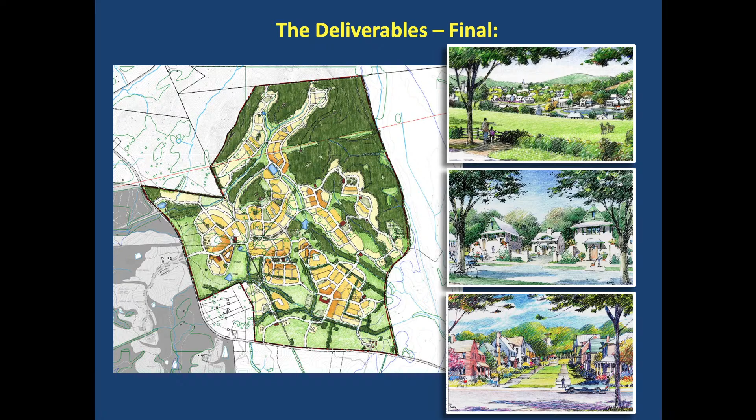Oh, by the way, this is just to remind me to talk about the comp plan.

This is the town of Jamestown, October 2000. I think this was recently, or is about to be updated, confirming this. This is the future growth strategy map, the future land use map, and it specifically mentions the Johnson property, and new traditional neighborhood development in language very similar to what we talked about last night. So it is consistent with that. This is an opportunity, if that's not what you'd like to see, this recommendation went through a very similar public vetting process. But if that's not what you'd like to see, this is another opportunity to potentially challenge that.

Assuming we're still tracking and consistent with the general preferences expressed by the community as a whole, and I think the dot exercises support that for the most part. We missed on a couple of things clearly, but for the most part it's more a matter of degree than whether or not it's specifically inconsistent with any of those goals and objectives. Just a quick reminder: neighborhood-based, walkable, connected, provides housing choice, range of house types and price points, and mixed use. As we just reviewed the dot exercise and the comments, I think these are all consistent. I don't see any inconsistencies here.

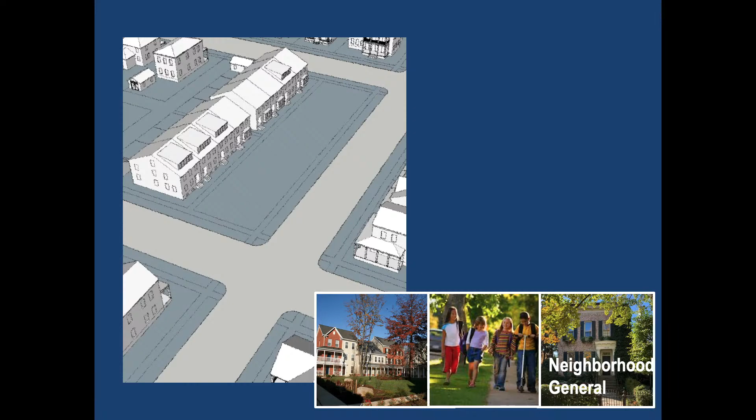So this is what I think we got wrong yesterday. When we talked about that neighborhood edge, we heard a lot about 'this isn't Jamestown' or 'we're being forced to pick a TND,' for instance. We talked about the attributes of TND in part because we believe that's a smart way to build a community, and that most communities most people like in most places actually have a lot of those attributes. It's kind of a question of how much of what, versus whether or not those principles are largely embraced. I think the exercise we went through did a pretty good job of showing that.

What we didn't show here - we showed a lot of neighborhood general conditions, but when we got to the neighborhood edge, this really didn't look like Jamestown. When we got that feedback online, I went and looked at all the images and examples we used to talk about these ideas, and I said, they're right, that doesn't look like Jamestown. That really wasn't our intention.

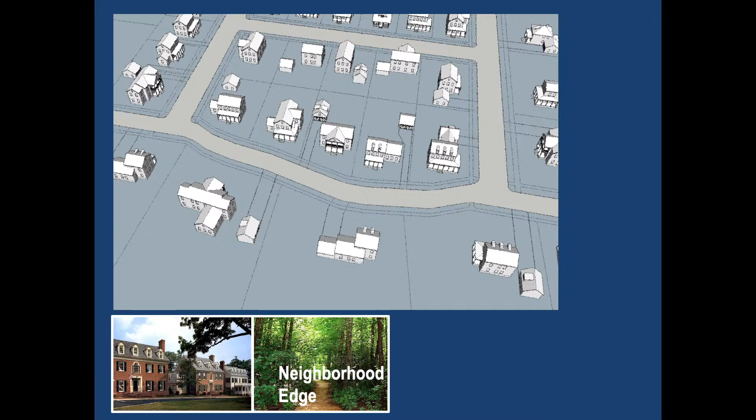So we took a few minutes off from our very busy, hectic, and challenging day, and we got some pictures of houses that look like Jamestown. You know how long it took us to get these?

About 2 minutes. You know where these pictures were taken? Right down the street. This is everything we're talking about here for the edge conditions. The garages are set back from the street, and they're either rear or side loaded.

All of this can go into a TND. In fact, we want this in the TND. This is the kind of edge condition that says you're in Jamestown, and it says there's market demand for this kind of product here, but also potentially market demand for other things, all of which together can make a great place.

We talked about how the design of the neighborhood itself can impact the value of the housing, and we can do exactly the same thing in Jamestown. So we didn't get it exactly right yesterday, but today is today. So we have an opportunity to put this back in front of you and ask, is this what you meant when you said it doesn't look like Jamestown?

You can go ahead and say yes or raise your hand, or whatever. We're going to ask the same question to people online. But I think we got this yesterday, we just didn't put it up there. This was an opportunity to come back and say, look, we got one thing wrong, and this is one of the things we got wrong. We got more than one thing wrong, but this is one of them. So when we plan these plans, when we say neighborhood edge, this is what we're talking about right here, okay.

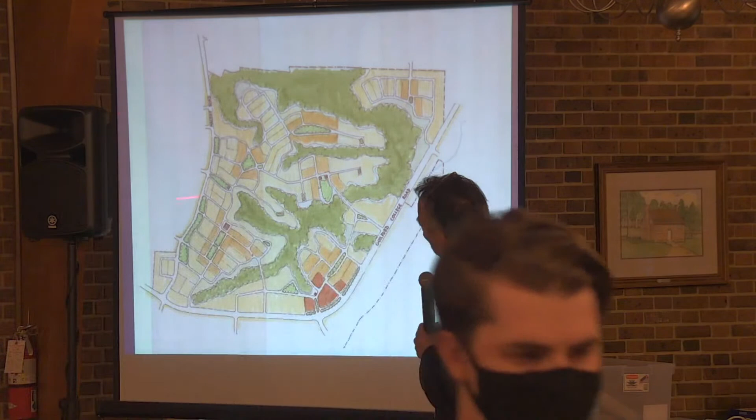Okay, so this is Guilford College. North is that way, I believe. So the community college is down here. This is Guilford Road, this is Guilford Road.

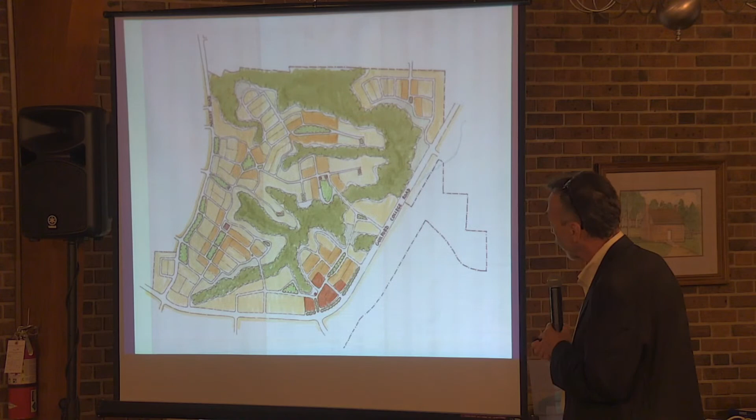Tomorrow night we'll have all of the plans oriented the same way. You can see that diagram we started with yesterday, where we blocked out all of the parts of the plan where we will not build, for all the reasons we talked about: stream buffers, creek crossings, steep slopes, et cetera.

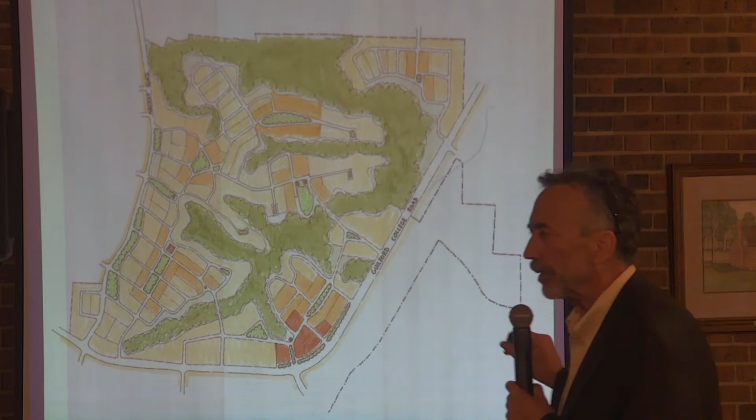This is a small neighborhood-scale retail commercial center. That's going to be a subject of discussion probably through the whole week, but it's much smaller than what we saw diagrammatically last night. And again, it can probably move, but this seems to be the frontage it wants to be at, because it's facing basically a utility easement and has exposure to the traffic along here.

This is basically a pocket neighborhood unto itself, because it doesn't really attach to anything, although there is a potential connection through there if needed.

One of the things we were trying to do here, there's a fairly large wooded area right there. When we have those, and we're trying to decide between what trees to save and what trees need to be sacrificed in the name of quote-unquote progress, we try to provide a nice neighborhood in lieu of those.

A lot of times we'll go in and document the specimen trees within the site and incorporate those trees. In fact, the Kentlands did that on one of the first projects of this nature—there was a beautiful huge tree that they actually made a little pocket park around. When you get to that level of detail, you can actually do that.

The flexibility of the plan gives you the opportunity to do that. And we would normally, if we were taking this all the way through, design at that level of detail. This is really more of a diagram, but it tries to capture the essence of the site and its potential.

So this is a neighborhood, not a pod, and it links through and connects up with other neighborhoods. You're taking a fairly disparate network of buildable parcels of land and trying to turn it into a community—a community of three neighborhoods. This is almost a more detailed physical manifestation of the diagram you saw last night, connecting the dots not only in terms of access, but also internally in terms of neighborhoods.

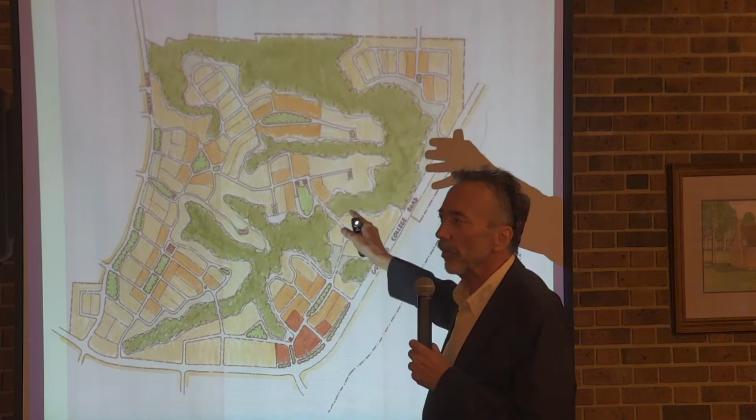The value of it is that it shows how those principles can be applied to a specific piece of land. But you could do a hundred different variations on this, and they would still respond to exactly the same principles, same preferences, same ideas we talked about last night. We don't have time to do that many, and we don't really think we need to, because we're trying to work towards the best possible plan based on the input we get from you.

But when it gets skinny, it gets skinny. Where it gets bigger, you have those small-scale, fine-grained street networks so that you can live here and visit your neighbor over there on your bicycle or on foot, without having to leave your pod and go into another pod, et cetera, et cetera.

You can also circulate within the neighborhoods very easily without having to get out onto the collector roads.

But we've also done things like this. Because we had an existing wooded area here, we kept that as a frontage condition. We looked at every single development along the street, and not a single house, residence, or even the dentist office actually faced the street. Everything else turned its back or its side to it. So we said, well, we could do that too, but we could also provide an amenity for the community as a whole. So that's what we did.

We also saved some of those trees to make a neighborhood park here, so that the trees are being respected and used in a way that adds value to the community as a whole. They're not just a stand of trees out in the middle of nowhere—they're adding value to every single home in that neighborhood.

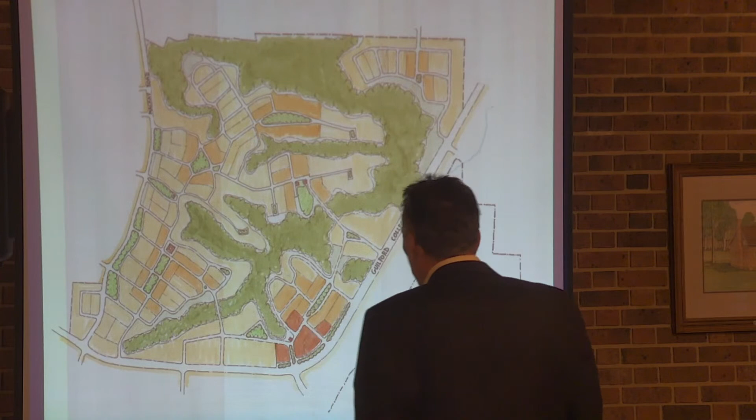The other thing that's nice is you could potentially bias some of these neighborhoods towards, for instance, more senior living or a different stage of life, young marrieds or whatever. But you have a range—you can certainly get a range of product types and price points within each of these. And it's not hard to imagine everybody feeling like they belong to the same community. That's exactly how they live. In fact, Keith and I were talking about that today.

West Haven, you said, is probably the most valuable piece of real estate in all of Metro Nashville. And he said the thing that makes it so valuable, in part, is because everybody feels like they're part of the community. You guys should talk to Keith. So that's the first plan.

Yes, sure. Yeah, sorry, yeah, I'd be happy to, and I apologize for that.

Well, again, remember, density is a relative thing. We had three people working, and everybody was sort of working at different levels of coming to terms with the site. One of the reasons why we use three designers, and sometimes more, is that everybody approaches it a little bit differently. What normally happens is that one single plan is not typically the clear winner, but the community will see bits and pieces of each plan. It's a little bit like the Chinese menu approach—you take the best parts of each one and then combine them together.

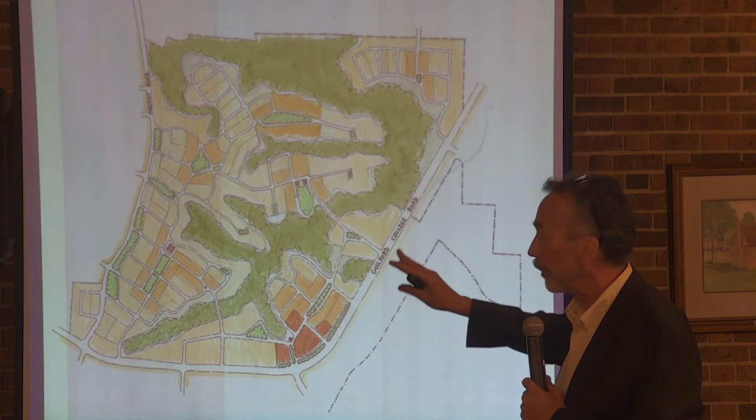This is pretty coherent for a first day. Again, remember, we started drawing—we didn't just start drawing this morning, we started designing it this morning. So this one is not quite so far developed, but that's the nature of this. When you start, you don't know where you're going to end up.

But getting back to your question about colors: the colors represent center, general, and edge. They go back to that diagram you saw last night. They each have a different character, and a little bit of a different bias in terms of relative densities. But all of that can be ramped up and all of it can be toned down, and I can show you examples of both in every pre-war neighborhood out there.

So don't fixate on the densities in overall terms. Just remember, this one is not really diagrammatically very strong, because generally speaking the center should be in the center, and here things got a little bit disconnected. Yellow is the general neighborhood condition, orange is supposed to be the neighborhood center condition, and the light yellow is supposed to be the neighborhood edge condition. I hesitated to put this up because it really isn't developed enough to talk to.

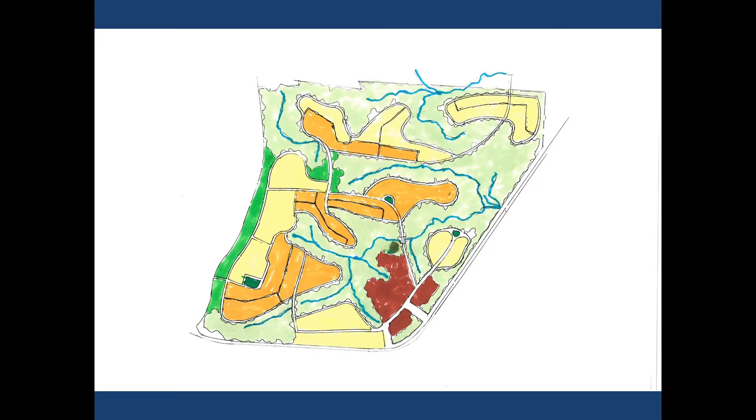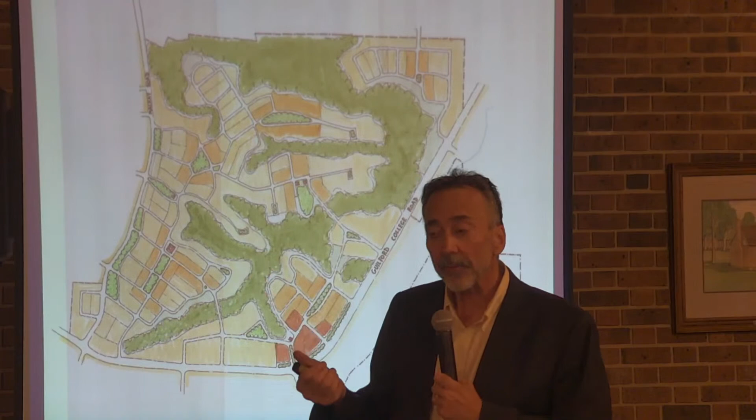But getting back to your question, these are the same—this is an easier diagram to understand. This is the neighborhood center, so it has the higher density house types. That could be townhouses, but it could also be narrow lot single family homes. Sorry to interrupt, but the darkest color is the center, and the orange is more the general. Oh—the yellow is the edge. Okay, then so everybody interpreted it a little bit differently.

But I would interpret it actually probably as the center and the edge. The point is, it's a hierarchy of relative densities and unit types, building types based on those relative densities. But we could make that whatever the community would like it to be. The idea is there's a neighborhood center, a neighborhood general, and a neighborhood edge condition, and we can decide collectively what that means in terms of density. Right now it's a diagram showing those principles applied to this piece of land, and there's a lot more conversation to have, but now we can have a conversation about an actual plan on an actual piece of ground.

So that's the point for that. But anyway, I'm sorry for the confusion, and this is probably more confusing than it is illuminating, so I'm going to move to this one.

This one's a little bit better as a direct comparison with the first scheme. It's oriented the same way again, but you're seeing the same notion of neighborhood center, neighborhood general, neighborhood edge. In this particular case, some kind of neighborhood-serving amenity, whether that's retail, a day school, whatever it might be.

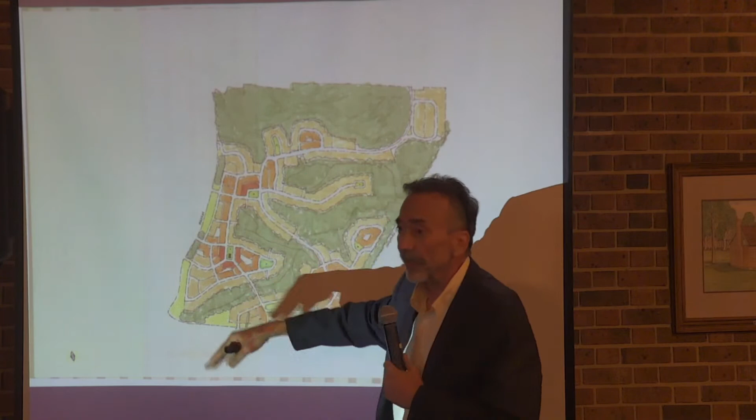You're seeing that same structure laid out, and you're seeing the places that are not only not developable, but could basically be a contiguous linear park or an emerald necklace, so we could put walking paths in there. We're preserving the natural habitat, but it's the shape and nature of the neighborhoods being informed by the topography and features of the site itself.

These need to be developed, and they will be developed, and to a large extent we're going to struggle a little bit to ask specific questions about what you like or don't like about these plans based on what we have here. So I'm not sure we should engage in that exercise right now. We'll meet again tomorrow night where we can develop these a little more. But you can tell us you like this plan better than that plan, and describe why. Okay, now a couple more things.

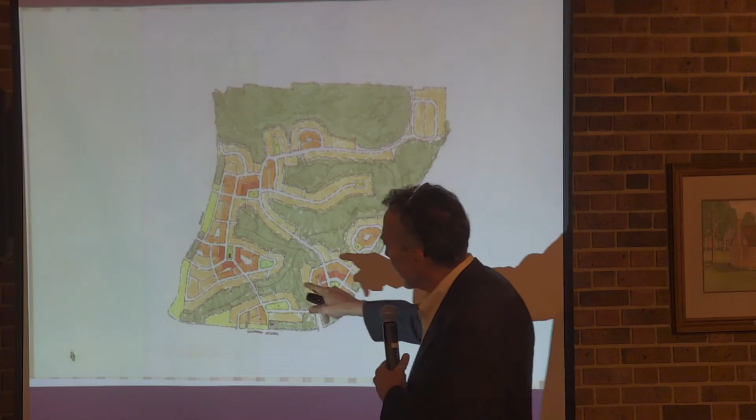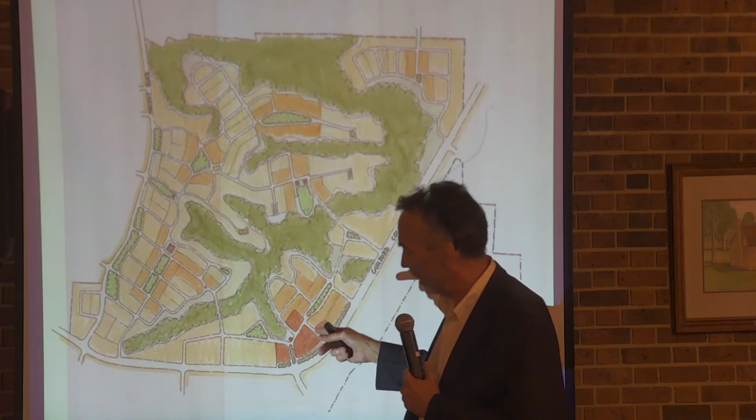This is another variation on trying to preserve that vegetated edge. This gentleman was drawing this plan, and I said I like that—I like your plan, but I think he has a better idea. So literally at 4 o'clock this afternoon, that part of his plan changed. We did a little internal pinup, if you will, and decided on behalf of the community that it did a better job of representing what we heard last night. Now, we may have gotten it wrong, but at least it's up there, and you can tell us whether you like that idea or not.

There's some other things going on here too. One thing we've been trying to figure out is how to handle that frontage condition. We actually measured—if you look at that utility easement, that's a Colonial gas easement, which, by the way, that same exact pipeline goes about a quarter mile from my house up in Maryland. Same pipeline—should tell you something about infrastructure. It actually has about 150 feet between the edge of the easement and the right-of-way of Guilford College Road.

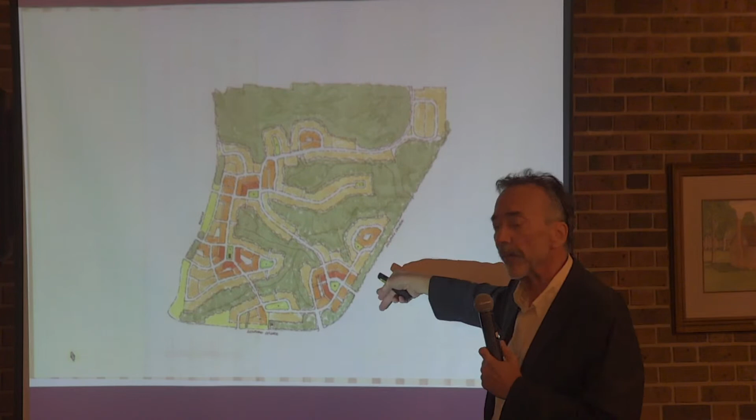So I think we talked a little last night about like-to-like, meaning the way we try to design the communities is that when you look out your front window, you see something that looks like what you live in. I skipped over that a bit on those neighborhood diagrams, which I can go back to. But this is a like-to-like condition. It's vegetated right now because the utility left a 100-foot deep vegetated buffer, and if you drive down that road right now, it looks like you're driving through the countryside.

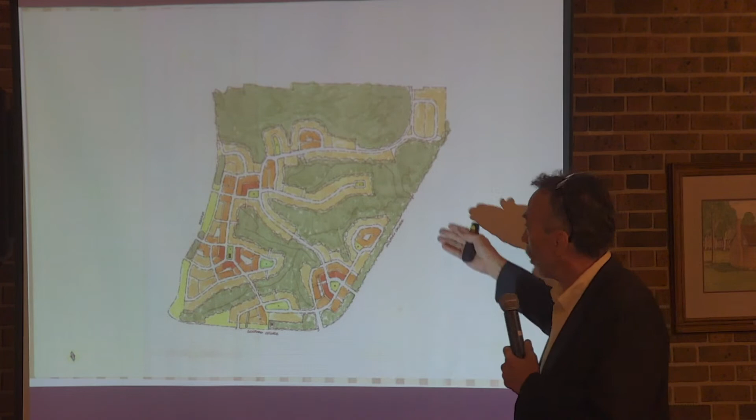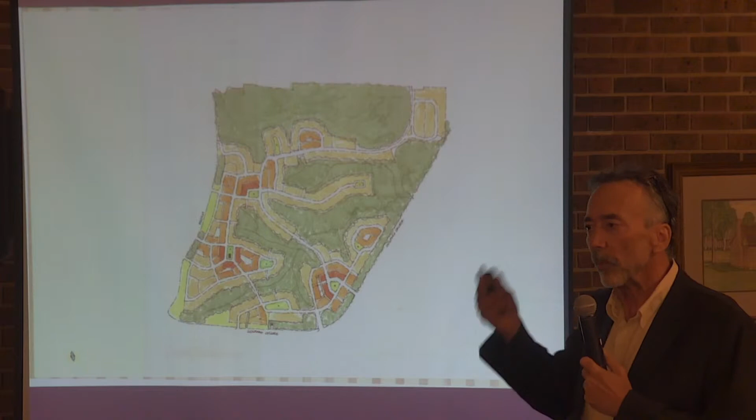So one option is to say, well, that's a four-lane suburban arterial, that's an opportunity for a shopping center or whatever. And shopping centers are not all bad—they generate nice tax revenue and provide goods and services that probably a lot of residents of Jamestown are leaving Jamestown to secure elsewhere. But this natural buffer is also a legitimate response. So again, this is a question—this is one way to handle that frontage condition.

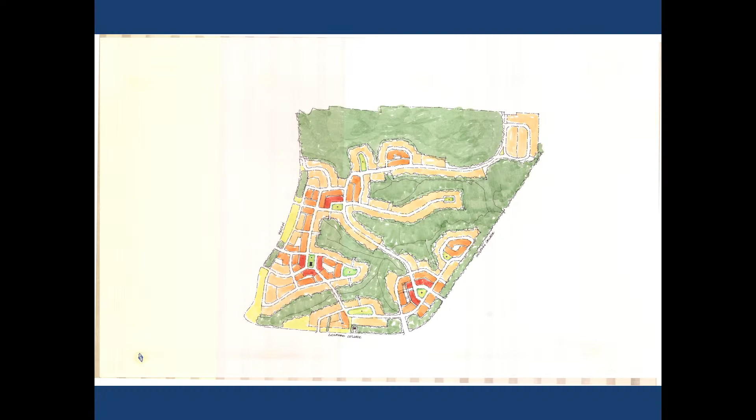Another way is to commercialize it. We've also talked about other options—one is putting small-scale apartment types along that edge as almost like a hard edge. There's a number of projects we're familiar with where they literally built a permanent wall there, engaged the apartment buildings in the wall, and made a very nice boulevard section out of that. This natural buffer is a legitimate option too, but there are other ways to do it. As we get further into this, we'll give you examples of different treatments for that frontage condition, so you can tell us what you like or don't, and let you know there's a dozen different ways that frontage could be designed in detail—it doesn't have to be all this or all that. We want you to have knowledge of what some of those options look like.

I'm going to go back real quick since we talked about that, okay.

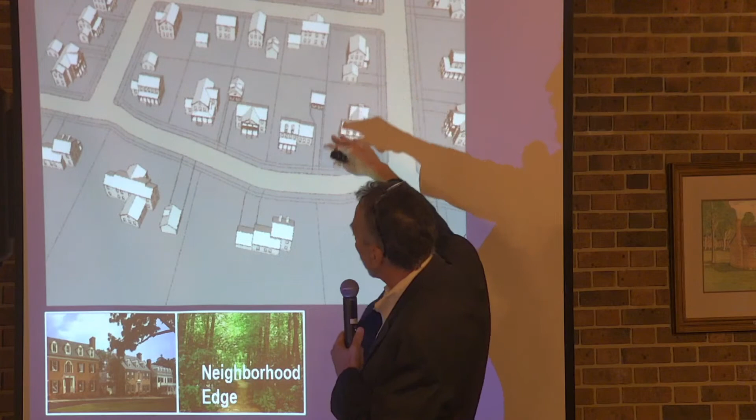So this is now getting out into the neighborhood edge condition. You can see the houses start to get bigger, the lots start to get bigger. At some point we transition from alley loaded, or rear loaded, blocks in the more general condition to a front loaded condition here. By the time you're out here, you could even potentially do a circular driveway or something like that.

But the point is, generally speaking, when you look out your front door, you see something that looks like the house you live in. This is where we talk about showing some platting, and making those transitions at the mid-block, so even if there's a transition in lot size and house size, it's within an acceptable range so it's not a jarring juxtaposition.

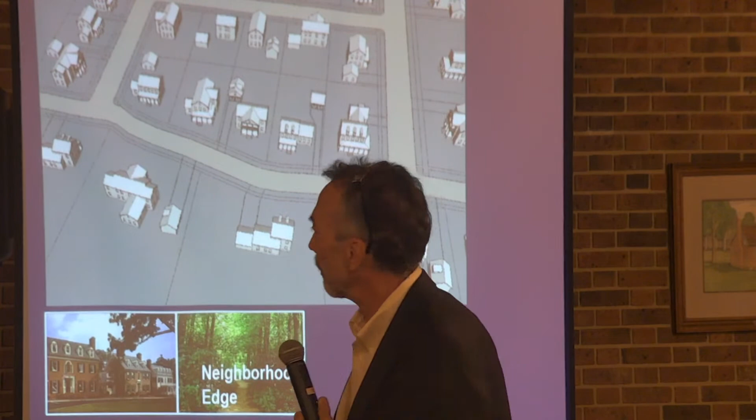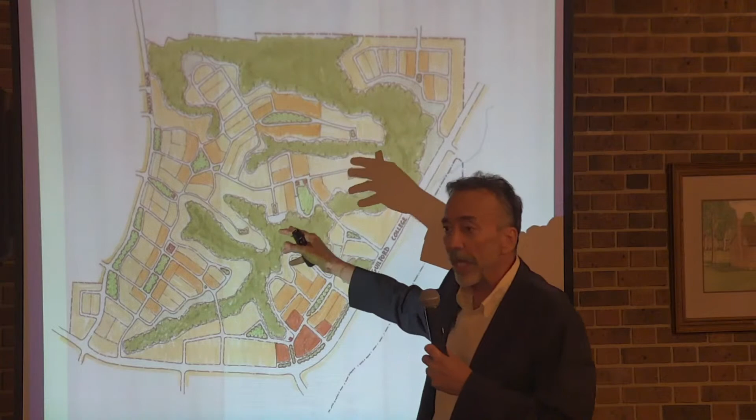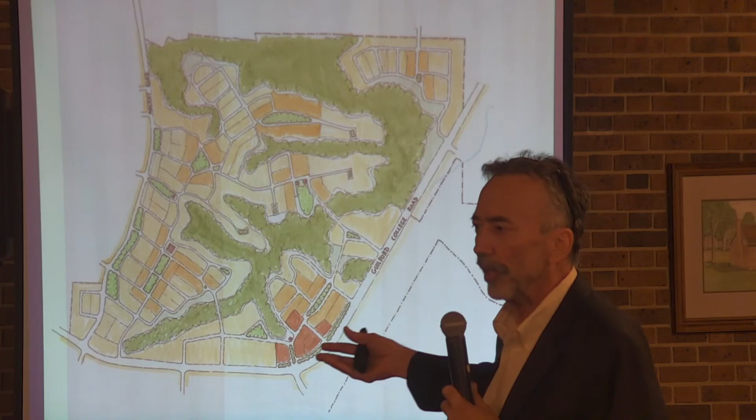As we continue to develop these plans in more detail, we will be doing detailed plans of some of these areas to show exactly how that would be done in these individual neighborhoods. There's only so much we can get done in a 4-day process on a property this size, but what we want to do is cover all the bases so that every important detail you need to know about and weigh in on, we've given you an opportunity to both understand and express an opinion on. Tomorrow we'll do a better job, but we're laying the foundation for that with this.

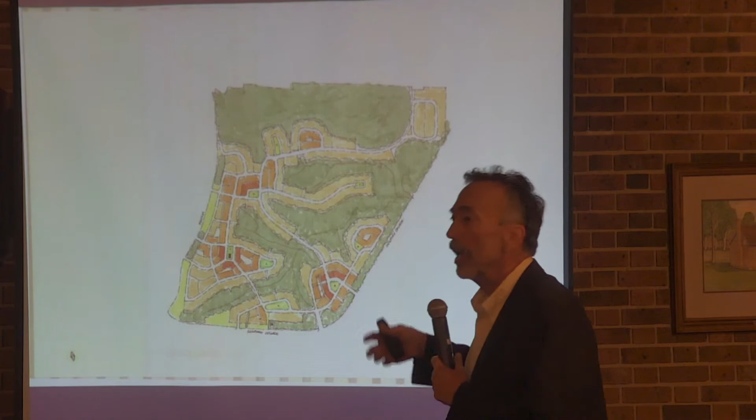So I think for tonight, as I'm about ready to wrap up, we're going to put these up and give everybody an opportunity to weigh in on which of these plans you think better represents what you would like to see on that property and what best represents the character and uniqueness of Jamestown. If there's something specific we've discussed this evening that you really like, like the vegetated edge or what have you, let us know, and we will incorporate that into the final plan and work in some of those other ideas too. Also tell us if there's anything here you specifically don't like.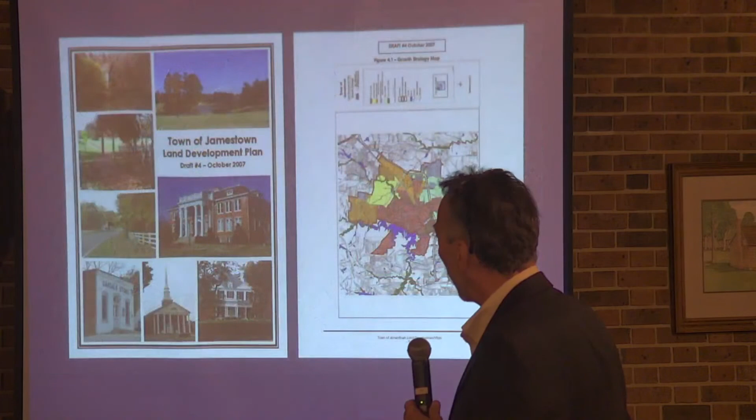These are also typically restored areas, and we did that on Carothers, where we restored the degraded meadows that were degraded by the dairy farms that had been on that site. There weren't trees on it, there was mostly just sick grass. That was a different project, but very similar to this. So I'm glad you mentioned sustainability, because it's pretty much in every single project we've ever done.

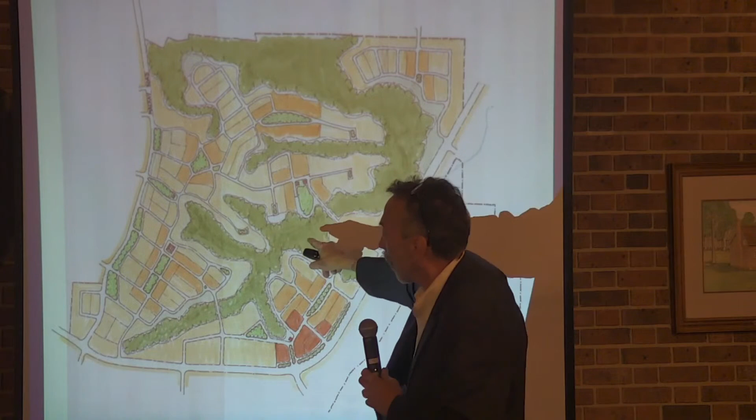These are all natural waterways, but they're also wildlife corridors, and on almost all the projects we work on, we work very hard to maintain not just those on our site, but the integrity of those corridors throughout the community as a whole. Thank you very much.

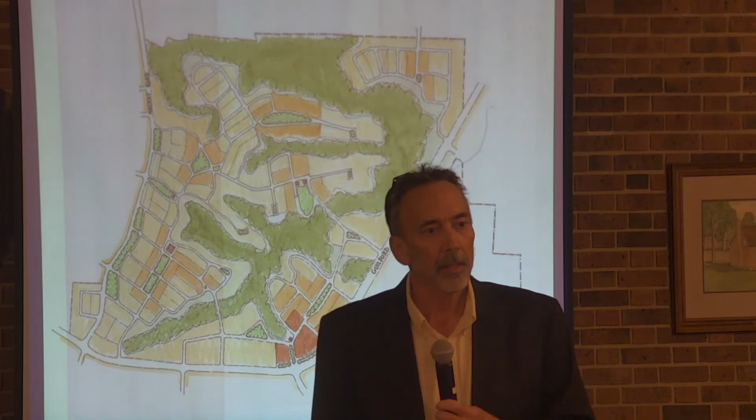We got another question right here? Yes, my question is just, in the comp plan, it says the TND maxes out at 200 acres. So what do we do? The TND maxes out at 200 acres, and we're just -

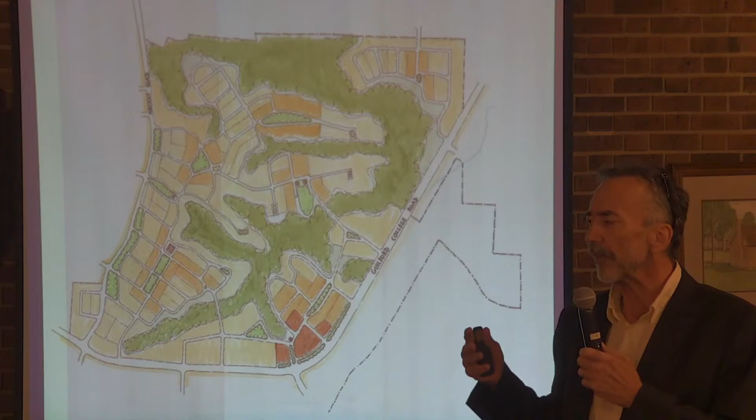Still in the planning process. It may be helpful if you repeat, because people are watching online and they can't hear. So the question was that the TND section in the comp plan says it maxes out as a single community, and is that being updated? The one thing we're doing tonight and this week is a planning process. We haven't decided. But it is important to note that this is consistent with the language that is in the comp plan.

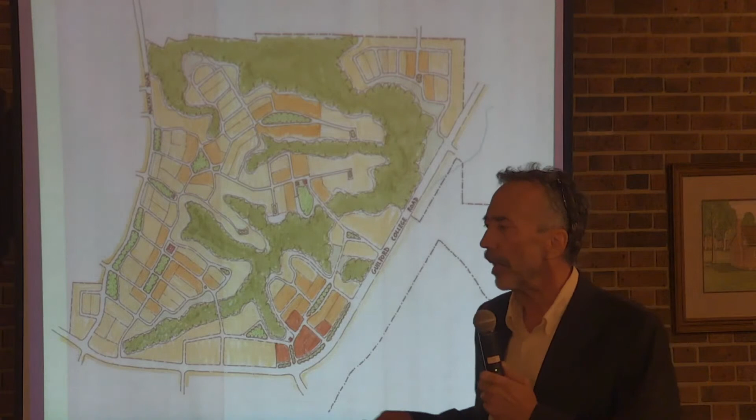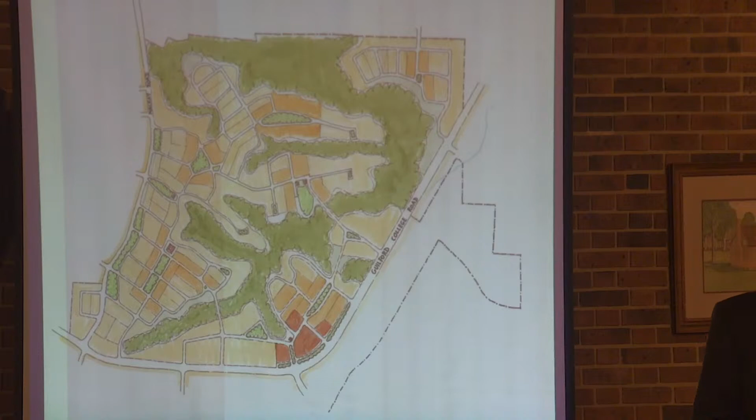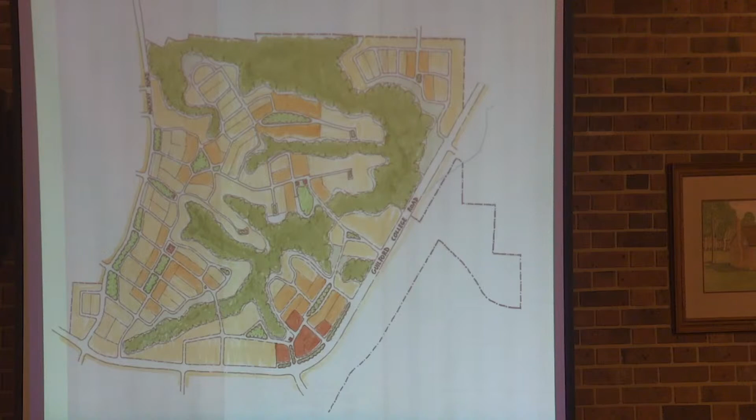And is that for the property as a whole or just the developable area? At the 2007 comprehensive plan, it was an overlay for the entire property at the time. There's some differing, slightly different language in how it's applied in the LDO. But again, this is a planning process, not a determining factor on what it's going to be zoned. The point is taken, but we're doing a visioning plan based on the application of those principles to a specific piece of property at this time. Thank you for pointing that out.

Yes ma'am. I was wondering, the part that's green that you say can't be developed, does that mean all the trees are left, or does that - The intention, and why it's not developed, is because either it's steep slopes, which would be subject to erosion, and then get into issues of water quality and so forth.

So normally in those conditions, the existing vegetative materials would be undisturbed, but you can also enhance those. I don't think we had the Carothers pictures up here, but there was literally a dairy farm that had been run into the ground, and part of our plan was to restore the original native meadows there.

How many voted in approval of the entitlement of that property? My recollection was it was unanimous, and we created a code specific to that property. The developer, our client, got caught in a bad spot in 2008 with too much outgo and not enough income yet. This type of development tends to be much more capital intensive on the front end, and he lost control of the property back to the bank. Every bottom feeder developer in the country, because it was fully entitled with infrastructure, wanted to buy that property and change the plan. And the county said, nope, this is what it was entitled at. This is its own zoning code, and that entitlement goes with this plan.